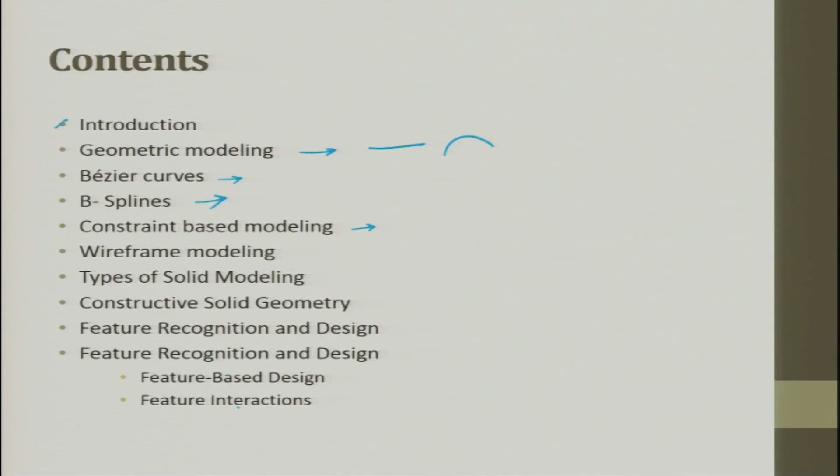So, Bezier curve, B-spline, then we have constraint based modeling, we will see wireframe modeling, then types of solid model, constructive solid geometry, feature recognition and design, wherein which we saw feature based design and feature interaction. So, these are the contents which we will try to cover in this lecture on CAD and CAM. CAD and CAM are nothing but computer aided design and computer aided manufacturing. It is the technology concerned with the use of computers to perform design and manufacturing function.

So, this design, as I said earlier also, will involve drafting. On top of drafting you will have analysis, simulation and optimization. This we will do in this designing. Okay. So, all these things could happen, softwares could talk, everything could happen because the data was in digital form. It can be in ASCII, it can be in binary. If I want to read, it will be in ASCII. If machine has to read, it will be predominantly binary. Okay. So, manufacturing function.

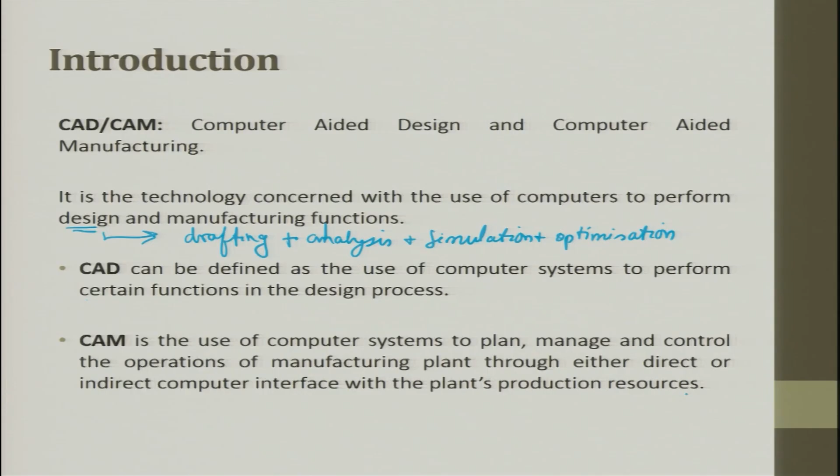The CAD can be defined as a use of computer system to perform certain functions in the design process. CAM is the use of computer system to plan, manage and control the operations of manufacturing plant through either direct or indirect computer interface with the plant's production resources. This is CAM. From CAM definition, the application of CAM falls in two broad categories. One is computer monitoring and controlling, and the other one is manufacturing support application.

Computer process data, you have a process. Computer process data and control signals, this is the advancement. So, first is computer process, the processing data is flowing. Computer process data and control signals are there. So, computer monitoring and control and manufacturing support application. So, in manufacturing support application, you will have computers and manufacturing operations. So, process data and signals will flow here. So, this is manufacturing operations. So, the CAM is divided into two categories: computer monitoring and control, and manufacturing support applications. When we talk about manufacturing support applications, it talks about supply chain and other things.

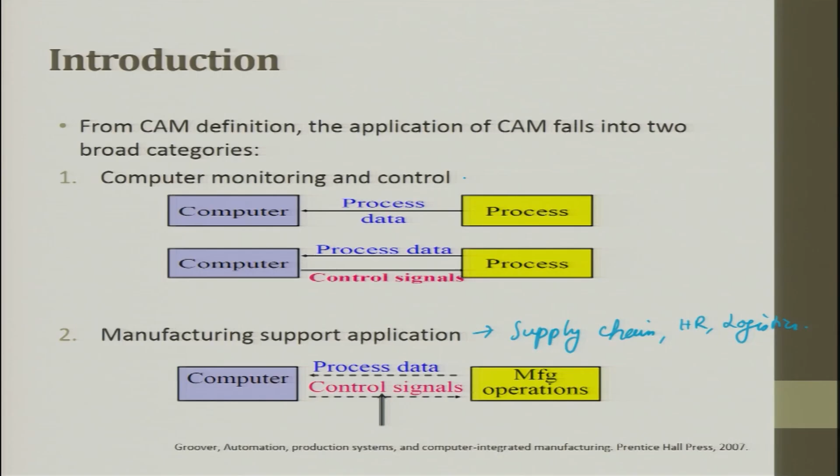Supply chain, HR, logistics. When we talk about computer monitoring and control, it talks about machines and sensors for online monitoring.

The product life cycle and CAD and CAM. In order to establish the scope and the definition of CAD-CAM in an engineering environment and identify existing and future related tools, a study of a typical product cycle is necessary. We will see the product cycle in the next graph. The following figure shows the flow chart of such a cycle. The product begins with a need which is identified based on the customer and market demand.

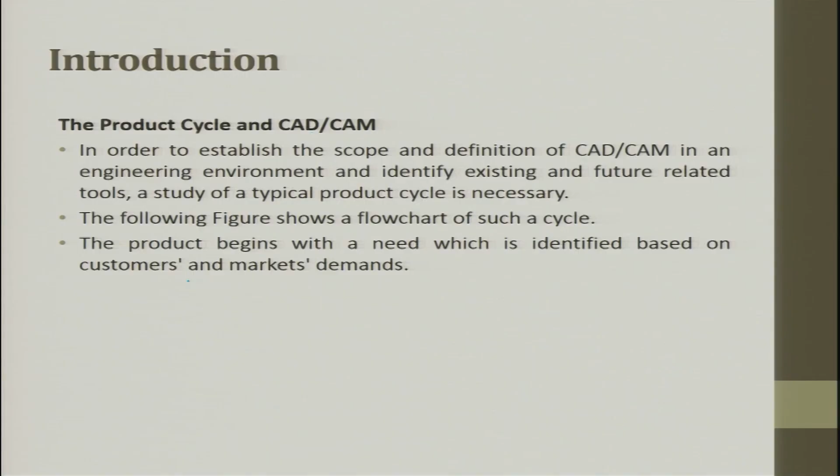After this comes design conceptualization, then design modeling and simulation. This leads to design analysis, design optimization, design evaluation and design documentation. So, these are all part of the design process. From the customer need you put a spec, after putting the spec you do the state of the art, and after doing the state of the art you develop concepts.

These concepts are all proofs of concept, and you can have functional requirements added to them. Then you try to optimize the developed POC such that it can go to the market. Once you do that, you will also have analysis, optimization, evaluation. Here it is only modeling and simulation. Once you simulate, then you optimize.

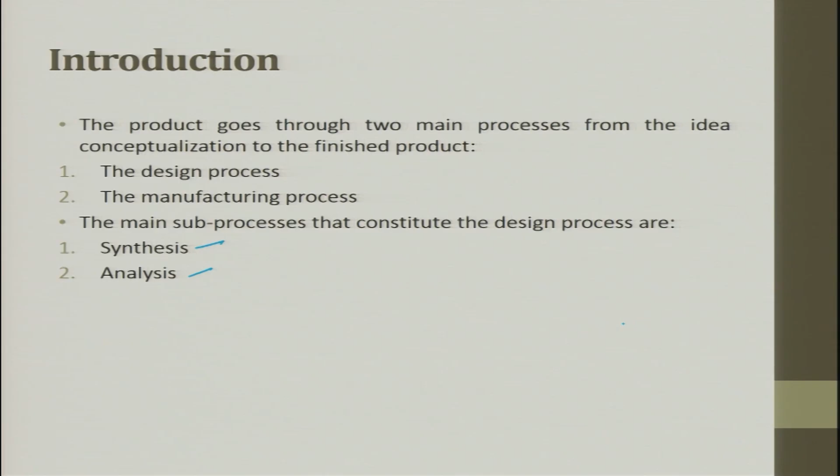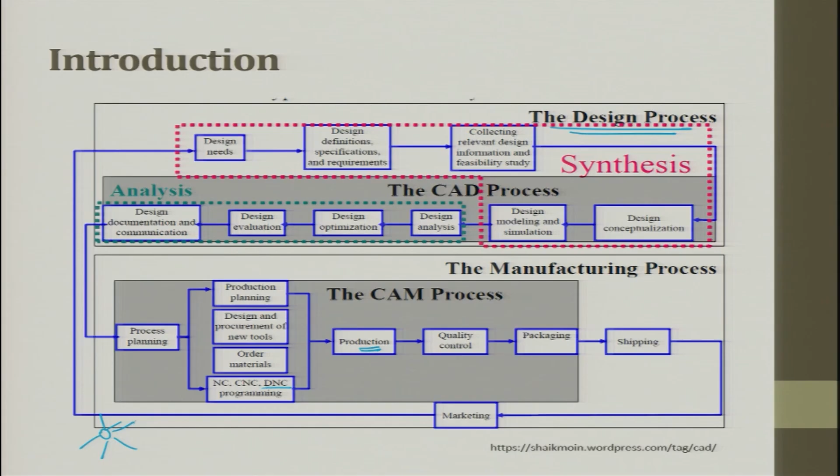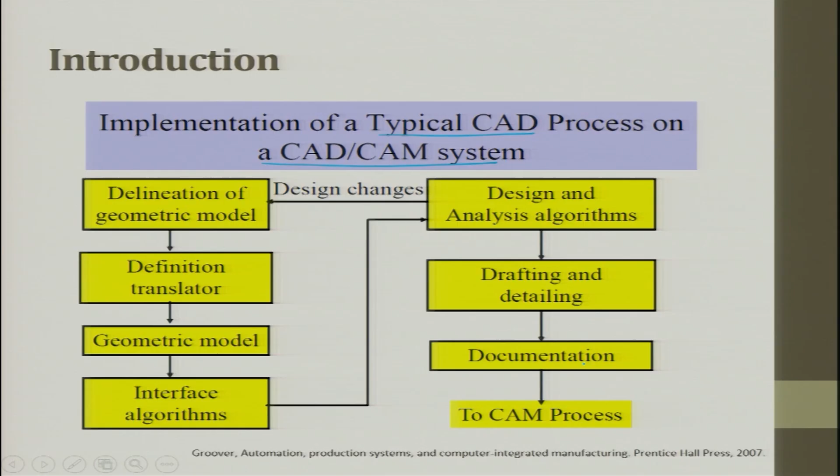The implementation of a typical CAD process on a CAD/CAM system involves delineation of the geometric model, then definition translator, then a geometric model, then an interface algorithm. This interface algorithm goes to the design and analysis algorithm, and design changes can happen between these two. Then comes drafting and detailing, documentation, and finally the CAM process. These are the steps involved in implementing a typical CAD process on a CAD/CAM system.

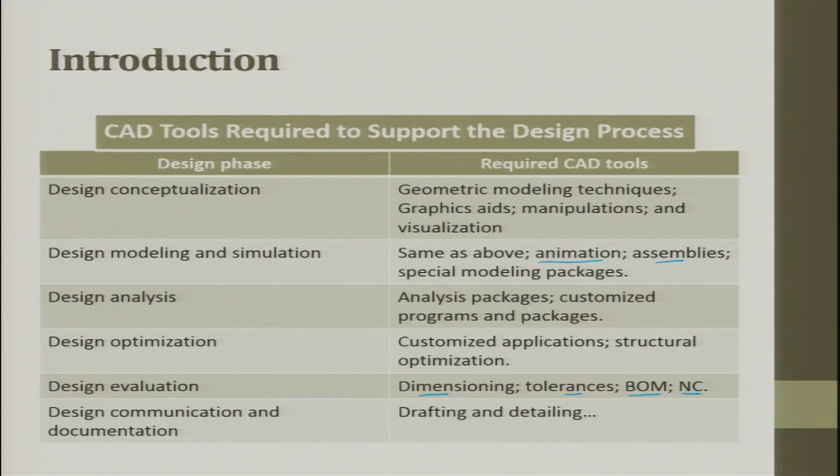Design communication and documentation will be there: drafting and detailing. So these are the design phase, and these are the tools which are involved in the design phase, or these are the tools required for CAD implementation.

When we have to implement a CAM process, whatever you have developed in the CAD, you do a feature recognition. Each feature has a process attached to it, then these processes are chosen, the machine is activated. So the machine knows what it has to do, like what process parameter, what is the tool path, and then it executes to get an output. That is the CAM process.

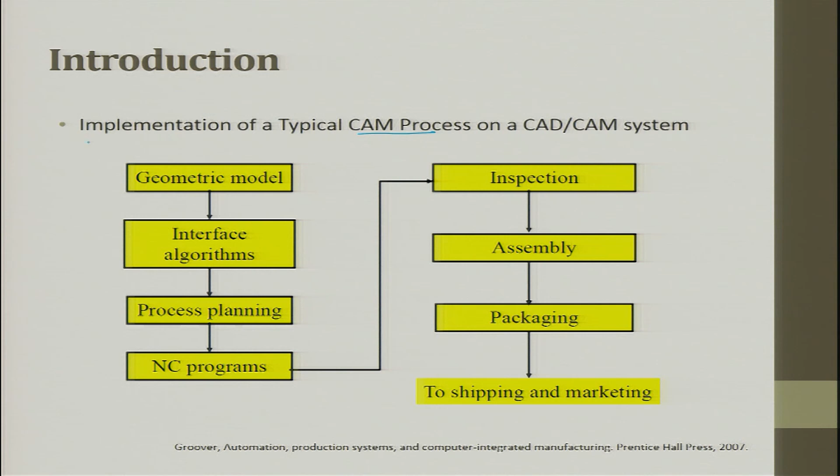So geometric modeling, interface algorithm, process planning is done, NC programs are generated, then you inspect, assemble, package and ship. So this is the implementation of a typical CAM process on a CAD/CAM system. In the same way as what we saw in CAD, the CAM tool requirements to support the manufacturing phase will be planning, process planning, part programming, inspection and assembly.

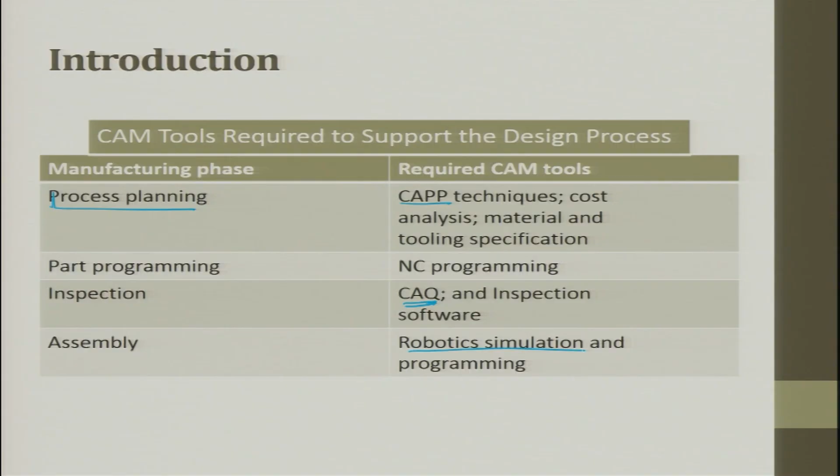So in process planning, we have computer aided process planning. So the computer recognizes the feature, generates a process plan and tells you. Costing analysis, which can be taken from CAPP, material and tool specifications. These are all part of the process plan. Then part programming, numerical control programming is done; inspection, computer aided quality control and inspection software; assembly, robotic simulation and programming are some of the CAM tools which are used in the CAM environment.

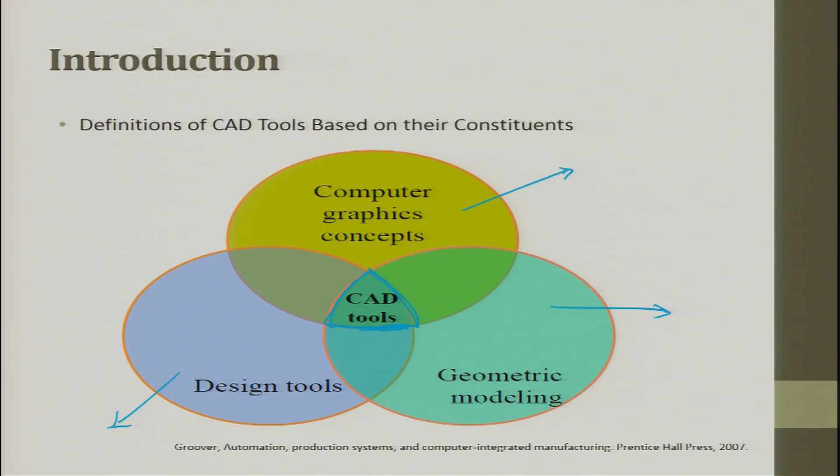So if you look at it, computer graphics concepts, geometric modeling is a separate circle and design tools is a separate circle. These can happen independently. This is the computer alone, this is the model alone and this is the design alone. So if you see, a CAD tool is a combination of A intersection B intersection C. It takes the common zone of the three things. So in the CAD tool, you will have computer graphics concepts, you will have geometric models, you will have design tools.

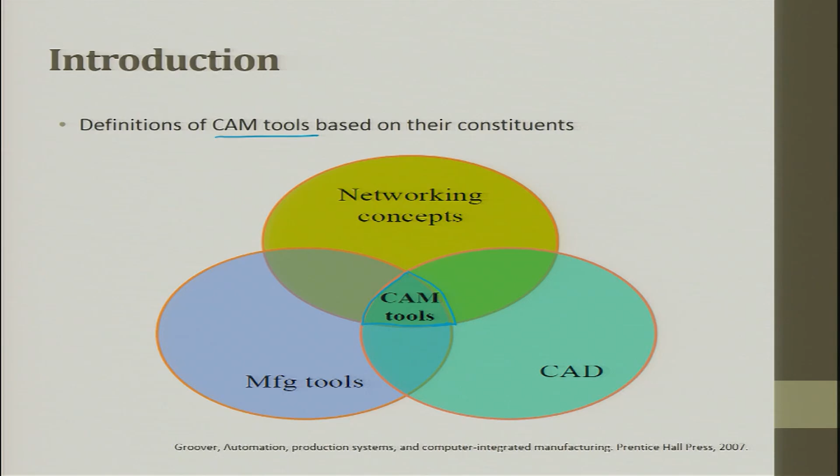When we talk about a CAM tool based on constituents, networking concepts, CAD and manufacturing all meet at a point that is called a CAM tool. All the CAM tools fall here. So you should have networking concepts between two machines; today we have wireless, wired. Then you should have CAD and the machine tool, which is the manufacturing tool. So CAD/CAM tools based on their constituents: design tool, manufacturing tool, networking, computer graphics, geometry, all of them meet at a point called CAD/CAM tools.

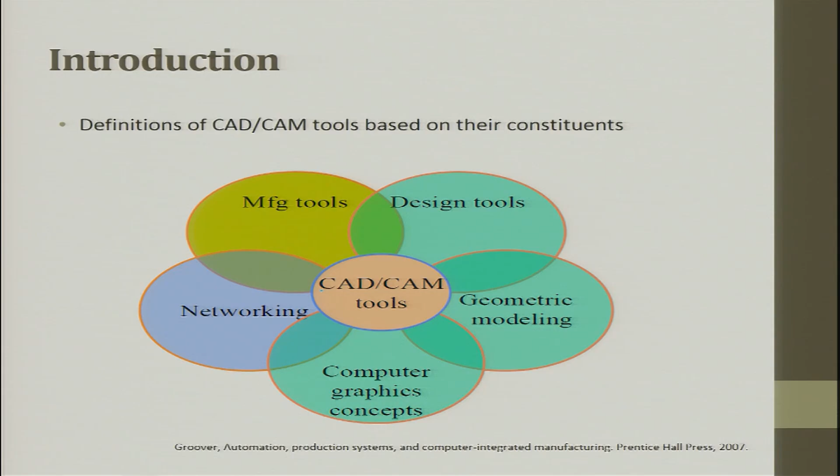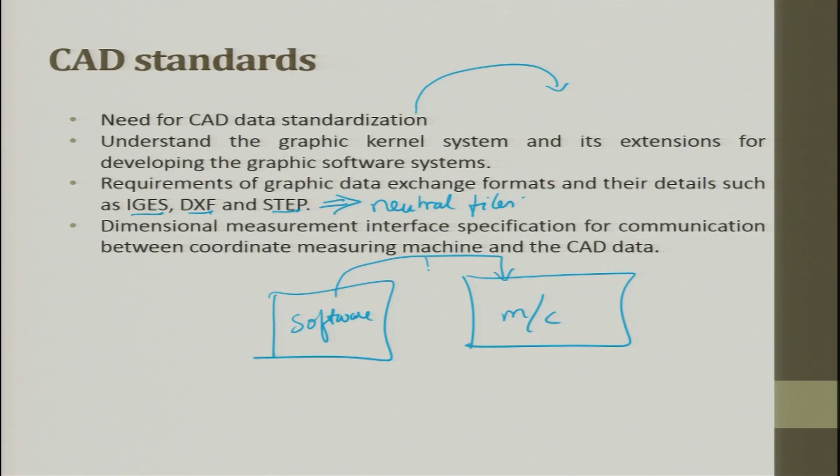What are neutral files? You have a system, you have a software, you have another software or a machine. If you want to transfer the data to this machine seamlessly, without any interference, then this is called a neutral file. So these are some of the standardizations in graphics.

GKS, graphical kernel system. You also have IGES, initial graphics exchange specification; DXF, drawing exchange format; STEP, standard for the exchange of product model data; and we have VDI, virtual device interface; VDM, virtual device metafile; and NAPLPS, North American Presentation Level Protocol Syntax. All these are standard neutral files which are used to transfer graphic data into manufacturing data.

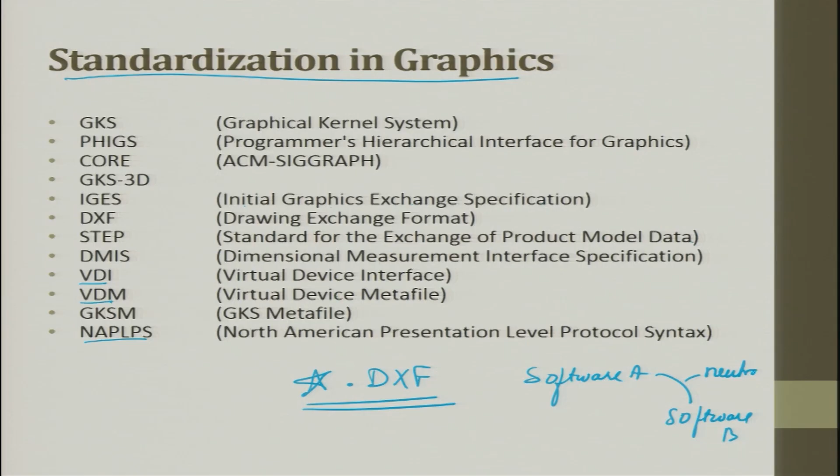So when you draw a component, after finishing the component you can store it with the extension *.dxf. Now this becomes a neutral file, such that when you move from software A to software B to process the data, you need a neutral file. So all these things are part of neutral files.

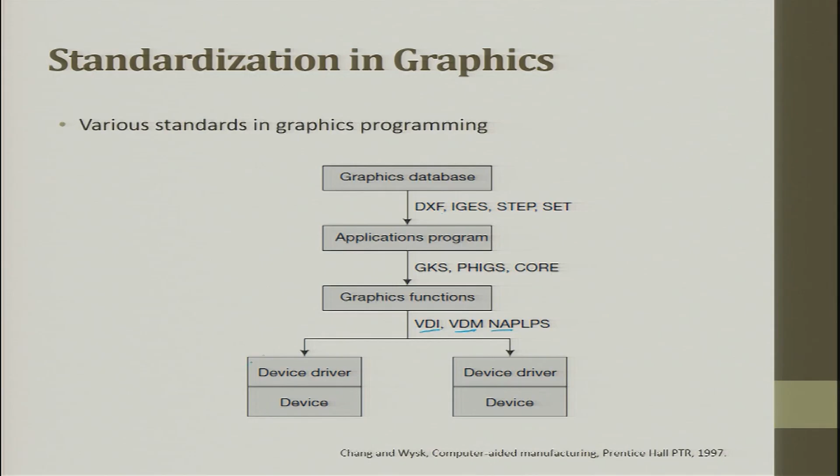Various standards in graphic programming. You have the graphic database, in which you use neutral files DXF, IGES, STEP and SET. Then we have application programs, in which you have GKS, PHIGS and CORE. You have graphic functions, which are VDI, VDM and NAPLPS. Then this will be further divided into device drivers. You can have two different devices which will all get linked to get the graphical program.

GKS, which is the graphical kernel system: the main objective put forward for GKS is to provide a complete range of graphical facilities in 2D, including interactive capability.

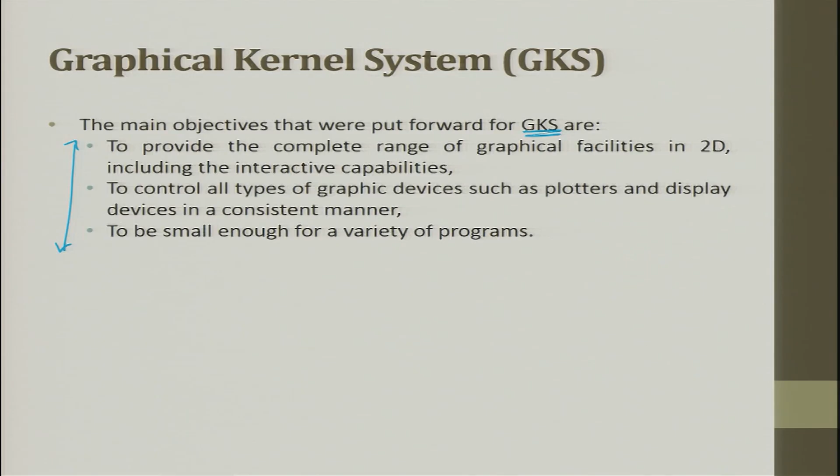You can edit, move and do. To control all types of graphic devices such as plotter and display devices in a consistent manner. So, this was the requirement for GKS. GKS again is a transfer of data from a CAD system to the device, to be small enough for a variety of programs. So, these are the requirements which were put so that the data can be transferred from a CAD file, from a CAD system to a plotter or to another accessory or to a machine.

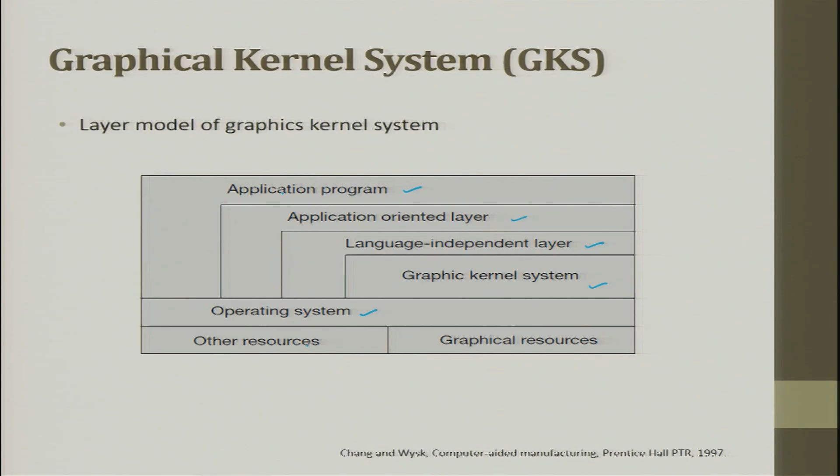The layer model of the graphic kernel system is: you have application programming, then application oriented layer, then language independent layer, then graphic kernel system. You have an operating system which is at the base. In the operating system again you have two other resources and graphical resources. So, these two are added to the operating system, then graphic kernel system, language independent layer, application oriented layer and application program.

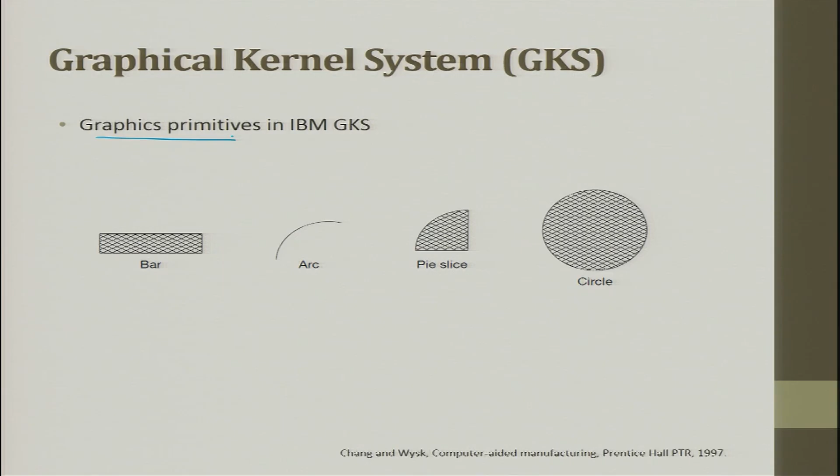Graphic primitives in IBM GKS are bar, arc, pie slice and circle. These are all primitives which are already available in the graphic kernel system. Other graphic standards are GKS 3D, PHIGS and NAPLPS.

So, the data exchange between various systems is CAD A to CAD B, CAD B to CAD C, CAD C to CAD D. So, you can have A B, B C, C D, D A. So, you can see all these things are linked. So, the data exchange between the various systems is very important. Otherwise, in manufacturing what will happen is you will have islands of automation, but all these automations cannot talk to each other. If it cannot talk to each other, then there is a big difficulty. Every time the data has to be transferred into the other system manually, and then you start doing some editing process.

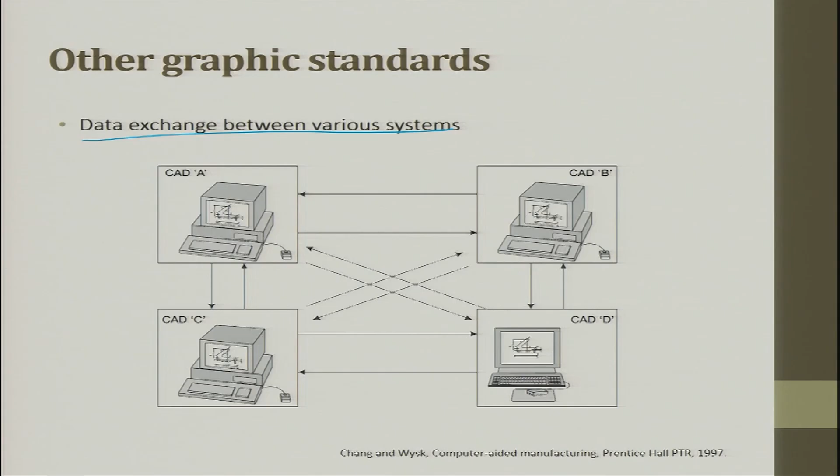So, development in the drawing data exchange format: these are the years when it was started, here are the contributions made, and this is how the evolution happened. So, IGES 1.0 came, then ANSI Y14.26M came, IGES 2 protocol, IGES 3 protocol, 4 protocol, 5.3 protocol which came in 1996, and this led to ISO STEP. And in between, IGES 3.0 led to PDES, which is nothing but product database format, and PDDI; they all came into existence.

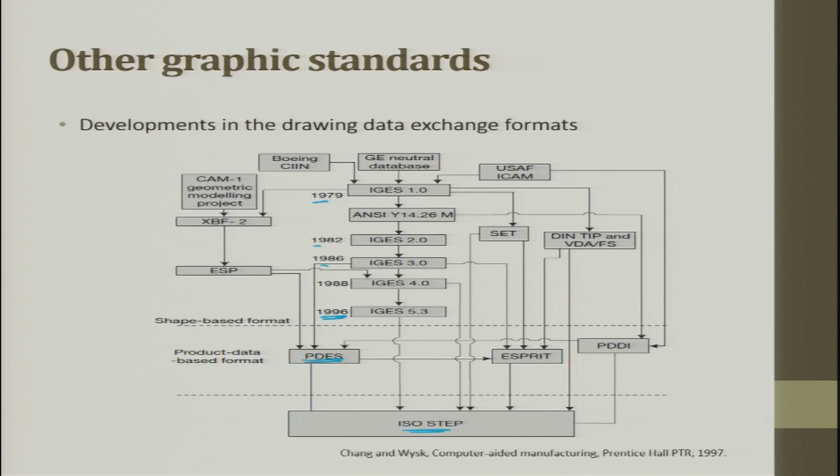So, here it is a shape based format, initial shape based format, then it is product database format, and then finally from all this evolution, today we talk about STEP, wherein the process details are also attached with the feature whatever is getting generated. IGES is the most comprehensive standard and is designed to transmit the entire product definition, including that of manufacturing and any other associated information.

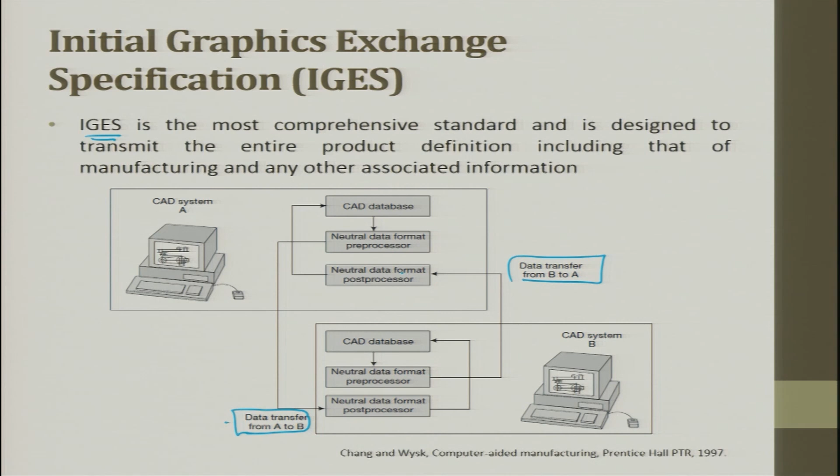Okay. So, the data transfer happens from A to B, or the data transfer happens from B to A. The only difference is if you say B to A, the neutral data format pre-processed gets into the post-processor, so that the data is understood by the other CAD system in a very logical manner.

So, this is how an IGES file looks like. A component which is a bolt, with a threading, with a head: component drawing and a part of the IGES file generated. You will see a stack of data, a column of data, which talks about an arc, line, B-spline, and then you have a curve, you have other surfaces. So, this is how the output of IGES looks, which is pre-processed, post-processed such that the other system can understand.

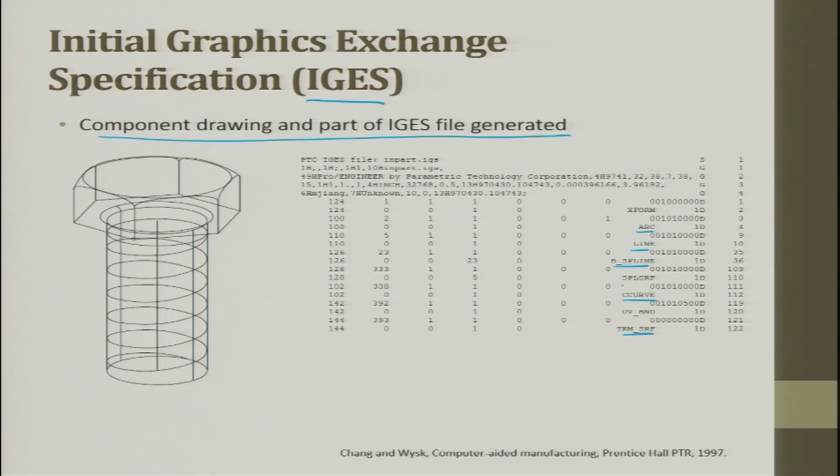The latest standard which we saw, ISO STEP. STEP is nothing but standard for the exchange of product model data. So, today we are not trying to transfer the data from one CAD system to the other as individual features or individual entities, but we are trying to completely shift it like a product itself. Like writing a small library function; a library function is already written. In this library function, you just put some parameters and you change the requirements whatever you want. For example, you have a library function of making a bolt.

So then all you have to say is what is the pitch you need, what is the length you need, what is the head you need - all those things. Then the system itself generates the entity. A step will happen where you will have other details like manufacturing tolerancing, and other details will also be attached along with the entity details.

A broad scope of STEP is as follows: the standard method of representing the information necessary to completely define a product throughout its entire life, from product conception to end of life, can be done by STEP. The standard method of exchanging data electronically between two different systems is done using STEP.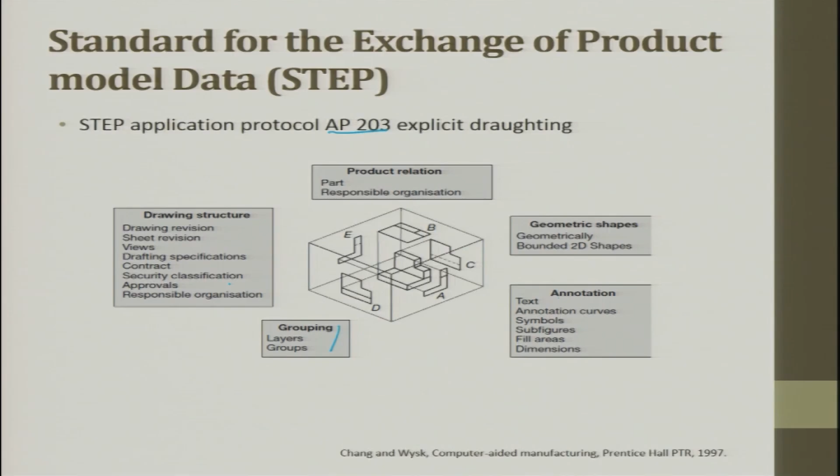So you have so many pieces of information coming out of STEP: product relation, part, responsible organization, then geometric shape, geometrically bounded 2D shapes, then annotation, text annotation, curve, symbol, subfigure, filling area, dimensions. Then we have grouping of them, drawing structures, drawing revision, sheet revision, view, drafting specification, contract, security classification, approvals, and responsible organization.

When we talk about controlled design, AP207 comes into existence - you will have configuration management, shape. Here you can see advanced BREP; we will see what BREP is as and when we go down. Then we see product structure, we see simplification.

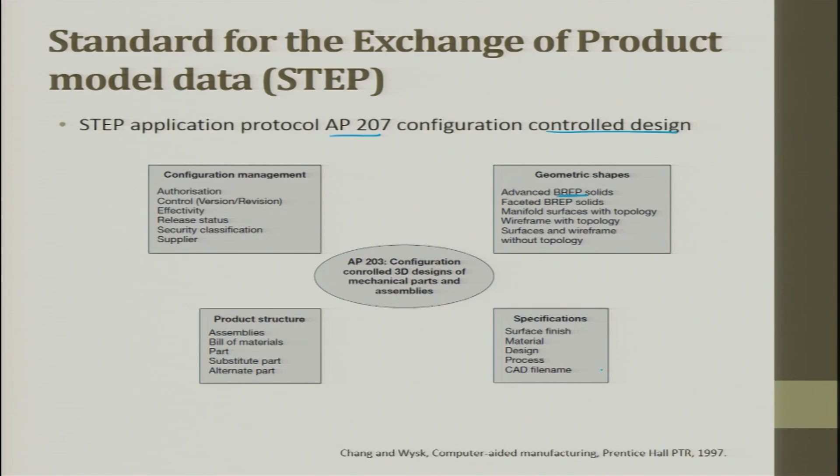Today, when we talk about ERP software, product structure and bill of materials can be attached directly to the CAD file, and you can extract information and send it to different departments of manufacturing. So STEP application protocol AP207, configuration control design, is this.

Here is another example of STEP file generation: sheet metal die planning and design. Again shape, definition, item, and then you have process plan, and whether the work is internal, external, start or change.

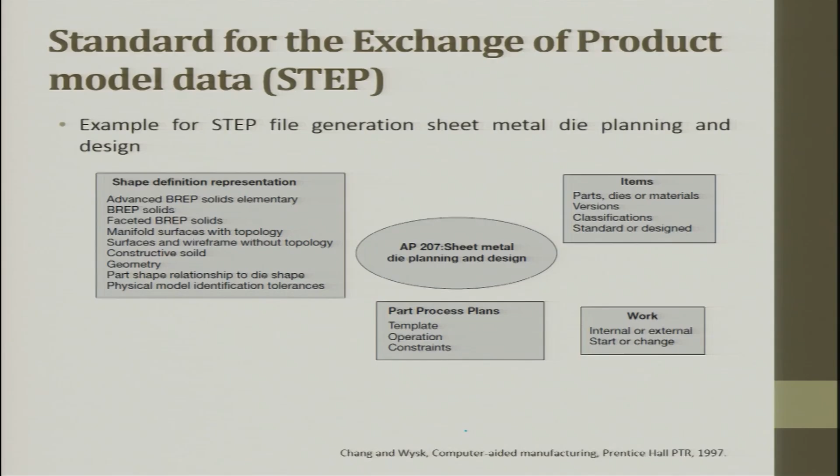DXF we saw, which is used by AutoCAD. The dimensional measurements interface specification, DMIS, is a new standard of communication being established by CAM-I for manufacturing.

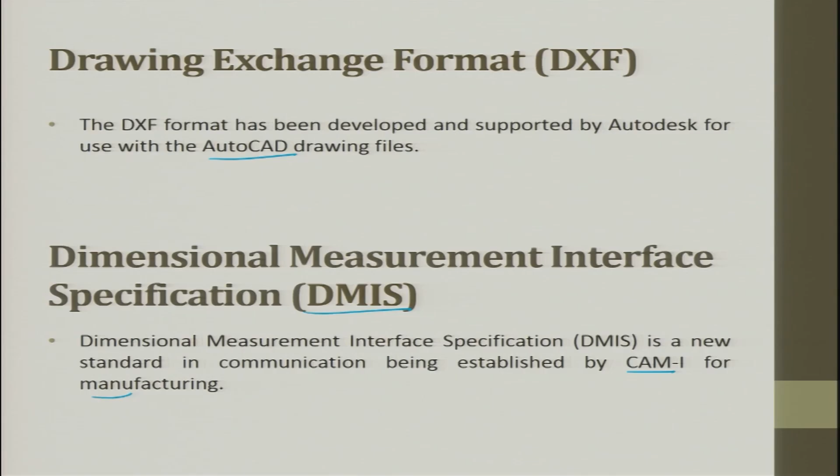Initially DXF and IGES were only used to transfer data from one CAD file to another CAD file, but once STEP came into existence, it is used to transfer CAD data to a CAM environment, and the protocol is more and more focused towards manufacturing, wherein dimensions, tolerances, the product life cycle - everything can be done.

So now let us move to the new topic, which is geometric modeling. How do I draw a part in a CAD file? That is geometric modeling - I will try to model a part in a CAD file.

The objective here is to understand the various requirements for the information that is generated during the geometric modeling stage, to study various types of geometric modeling possible and their applications, and develop various methodologies used for geometric construction such as sweep, surface modeling and solid modeling.

Recognize the various types of surfaces and their application as used in geometric modeling. Appreciate the concept of parametric modeling, which is very important - we will see later - which is the current mainstay of most 3D modeling systems.

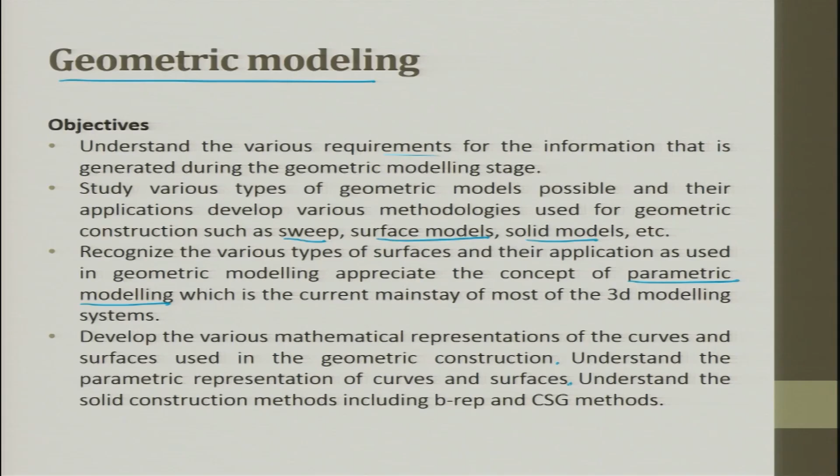Develop the various mathematical representations of curves and surfaces using geometric construction. Understand the parametric representation of curves and surfaces, and then finally understand solid construction by including BREP and CSG.

When we talk about geometric modeling, the requirement for geometric modeling is you have to have an idea, you have to have a production, you have to have a design analysis. The center part is the geometric modeling - the geometric modeling is the center part of the product design.

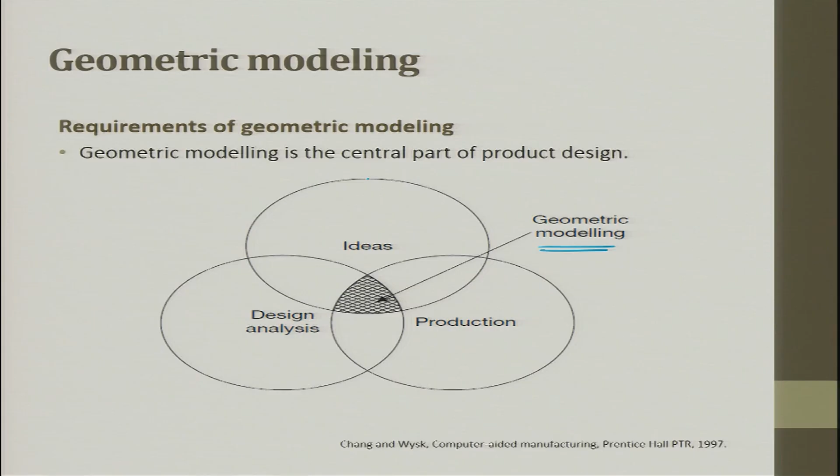What are the functions of geometric modeling? In design analysis, it is used for evaluation of area, volume, mass, inertial properties, checking in assembly, tolerance build-up in assembly, analysis for kinematics - that is mechanics and robots. It is also used for auto mesh generation for finite element analysis. All these things are done at the design stage, design analysis.

Then when we start using this for drafting - geometric modeling for drafting - we can automatically get planar cross sections, automatic hidden line and surface removal, automatic production of shaded images, automatic dimensions, and automatic creation of exploded views for technical illustration. All these are functions of a geometric model.

Here it is more of drafting, so that is only drawing - that is why you see cross section, creation of exploded views and all those things. Here if you see area, volume, CG, mass - all these things can be evaluated from the design analysis.

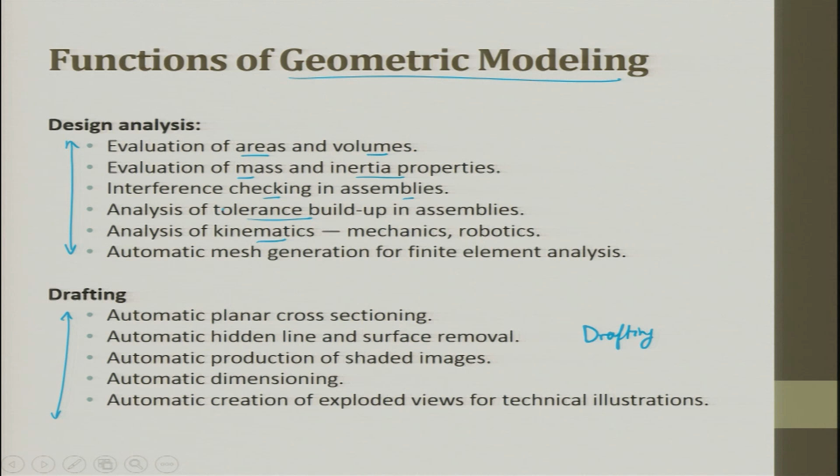When you talk from the manufacturing side, the geometric model is used for part classification. What is part classification? Part classification can be done based on the design similarity or on the manufacturing similarity. Design again can be divided into prismatic and it can be divided into circular.

If we see later, we will look at group technology. If I want to classify a part and give it a part number, geometric modeling plays a very important role as the input data. Then comes process planning, numerical control data generation and verification, and robot program generation.

These are the functions of geometric modeling in manufacturing. In production engineering, bill of materials, materials requirement, manufacturing resource requirements and scheduling are all functions of geometric modeling. Finally, in inspection and quality control, program generation for inspection machines and comparison of the produced part with the design are part of this process.

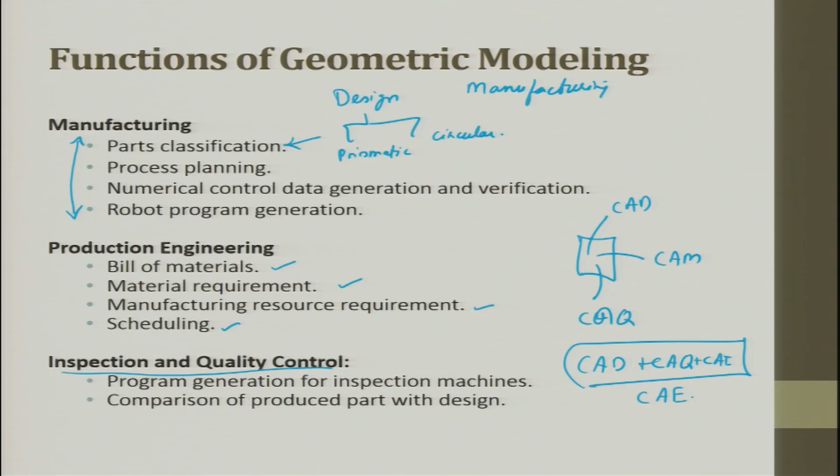Today we talk about using the same center data created for CAD, moving to CAM, and then to CAQ, computer aided quality control, for checking. So CAD, CAQ, CAM, all of these lead towards CAE, computer aided engineering.

Requicha and Voelker specified the following properties desired in any geometric modeling system. The configuration of the solid must remain invariant with regard to its location or orientation. Whatever orientation or location you take, whether viewed from the front or the top, the geometric model should have a consistent figure. There should not be any variance.

The solid model must have an interior and must not have isolated parts. For example, you cannot have something like this and say these two are interlinked.

The solid must be finite and occupy only a finite space, a closed volume. That is why you can do mass calculation, inertia calculation, volume calculation, and CG calculation, all of these things, because it must have a finite and occupy only a finite shape.

The application of a transformation or other operations that adds or removes a part must produce another solid. So if you have a solid like this and a cylinder like this, and you say A minus B, you should get something like this, an object with a hole inside.

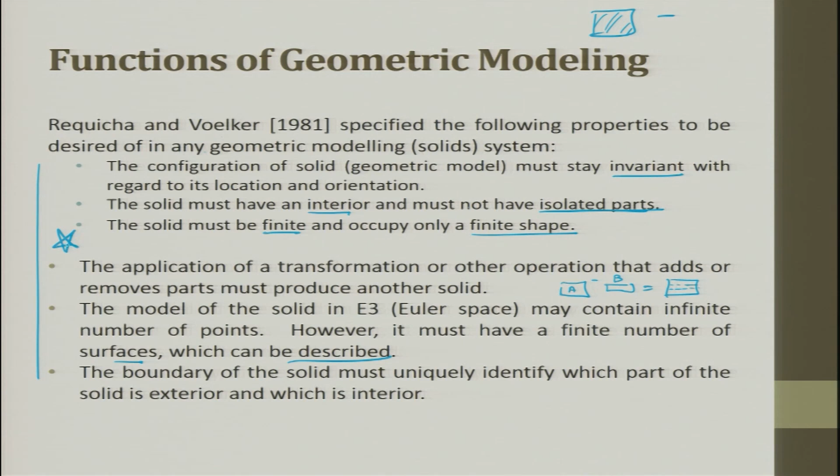A model of the solid in Euler space may contain an infinite number of points, however it must have a finite number of surfaces which can be described. All these points are very important to validate an object, or to state as functions of a geometric model.

The boundaries of the solid must uniquely identify which part is interior and which part is exterior. All these things are very important for us in this course, because whatever CAD data you create, if it does not follow the functions of a geometric model, then this data will be transferred to the rapid prototyping machine, and the machine will start executing it.

The moment it executes, if it cannot identify interior and exterior, it is too difficult for it to build a part. Second, if it does not form a finite volume, for example if you have a square like this, and this CAD data is given to rapid prototyping, since it is not closed, it takes the rest as a valid object, and continues, making this projection part of the rapid prototyping process.

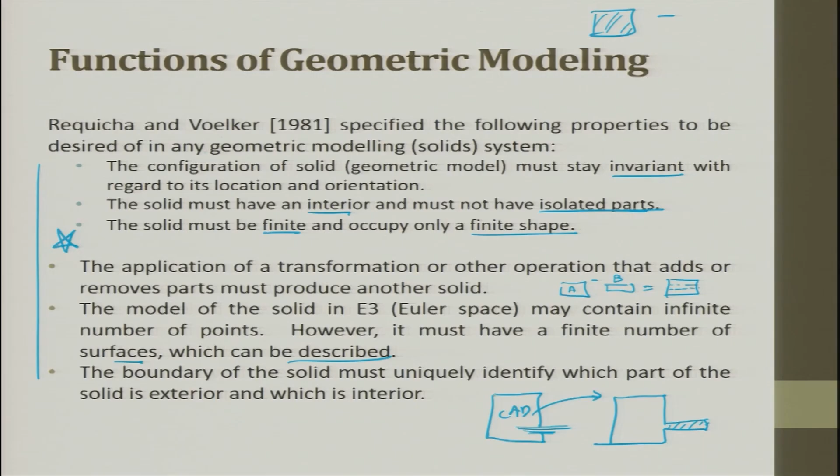So geometric modeling is very useful. The functions and properties of geometric modeling are very useful as far as rapid manufacturing is concerned. Any mistake here, when taken to the next stage, gets amplified.

Geometric modeling can be 2-dimensional or 3-dimensional. For 3-dimensional principal classification, they fall under line, surface, and solid. A dot and a dot lead to a line, vertices to an edge. These are edges and these are faces, and several faces join together to form a solid. So, point, point to line, line to surface, surface to solid. These are the three principal classifications in geometric modeling.

So you can see here P1, all these are points, P1, P2, P3, P4, P5, 6, 7, 8, 9, 10, 11, 12.

So P1 to P12 are the points, and these points are joined by a line. Now these points and lines join together to form a surface. So you had P1 to P12, now you have S1 to S8, which are surfaces - S1 through S6 at the back side, S7 at the bottom, and S8 at the other side.

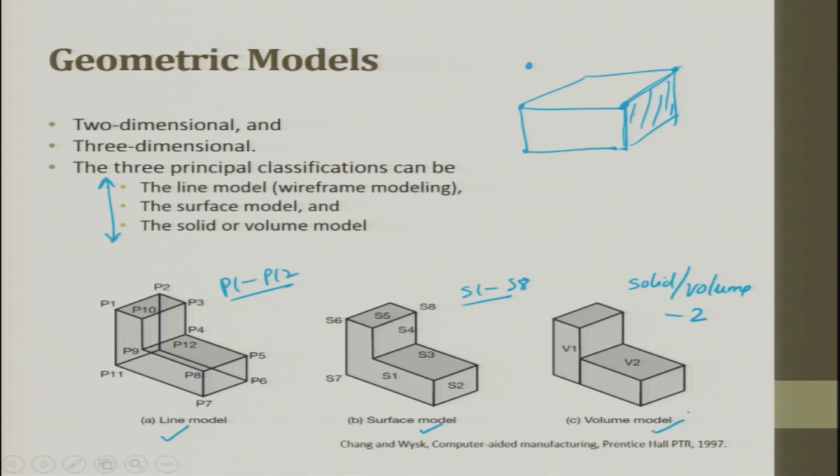So in geometric modeling you will have all 3 possible things. In geometric modeling, when you represent it in a wireframe - what is a wireframe? Wireframe is nothing but you have points, and these points are joined by a wire, and this representation tries to give you a solid.

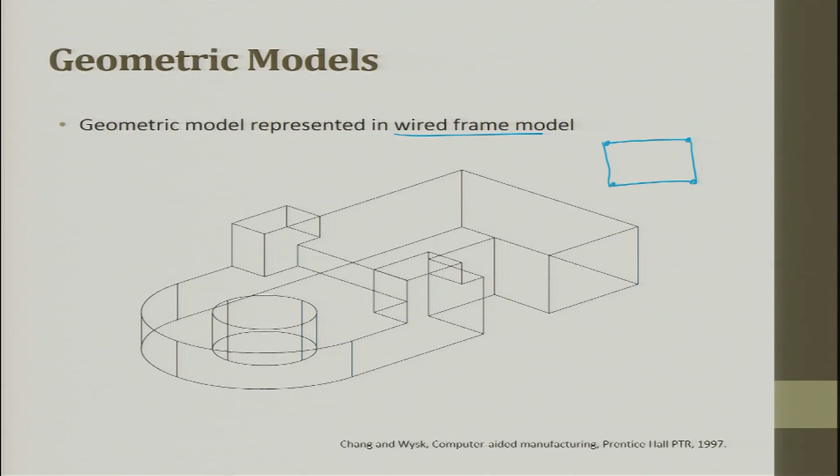But unfortunately, when you use a wireframe model, it gives a lot of misinterpretations, and it can also give you a solid which is not very valid. But it occupies very less space, so editing and storing becomes little easy. But the representation is ambiguous - impossible objects can be modeled using this wireframe.

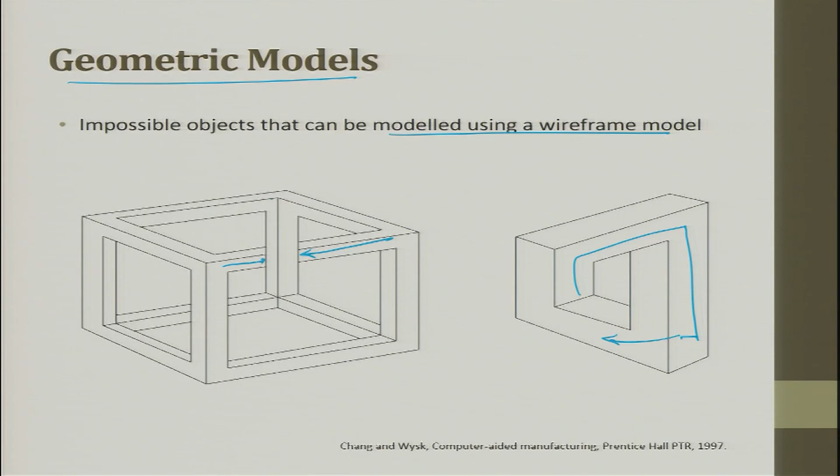So you see here, this is an object - you have to see it like this, and here, if you see, the block or beam goes behind the column. So geometric modeling wireframe model can be used to model impossible objects, or it leads to ambiguity. That is why wireframe is not exhaustively used.

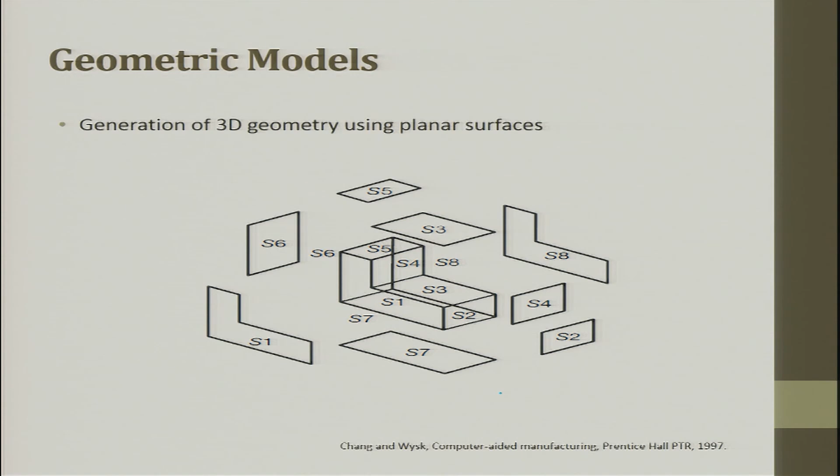Generation of 3D geometry using planar surfaces - you have so many surfaces, and these surfaces join together to form a solid. So comparing the 3 different models - line model, surface model and solid model - what we want as far as rapid manufacturing, rapid prototyping is concerned, is only the volume model, that means the solid model. We are least bothered about line and surfaces.

Automatic view generation is impossible in line model, impossible in surface model, possible in volume model. Perspective and orthographic views are possible only in volume. Cross section, if you want to do, manually you can guide it - in surface also it's manually guided, but in volume it's possible, even automated cross hatching is possible as far as volume is concerned.

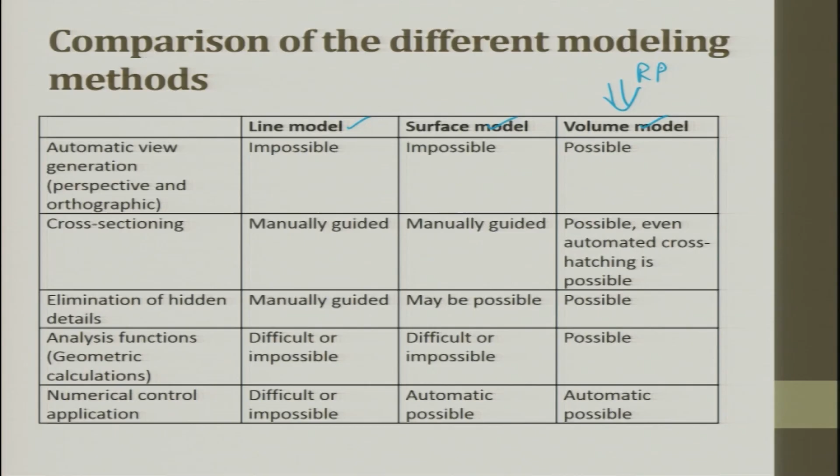Elimination of hidden details - it is manually guided here, may be possible here, and it is definitely possible here. Analysis function is difficult in line, difficult in surface too, but possible here. Numerical control applications are difficult or impossible here, but automatically possible here, and automatically possible here. So what we need for RP, rapid manufacturing, additive manufacturing, is the volume model.

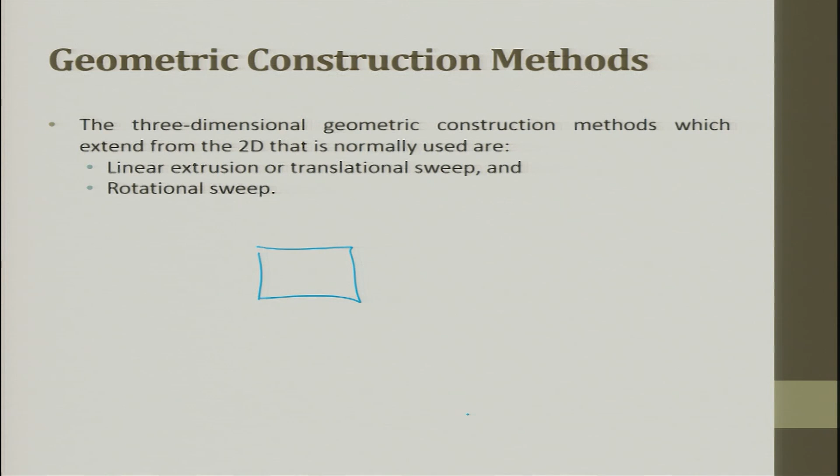The 3-dimensional geometric construction method which extends from 2D that is normally used are linear extrusion or translational sweep. What we are trying to say is, suppose I draw a square and then I say please extrude the square along this line.

Now you get a channel. So if I want to represent this, I can represent it as a surface, and then I say in this direction Z, please try to give a thickness of 5 millimeters or 5 meters, whatever it is. So this is line extrusion of the square or rectangle - translation sweep, also called a sweep, line extrusion or sweep.

If you want to do a rotation sweep, this object, when you have a rotational sweep, tries to convert it into a full solid object. This is rotational sweep - the 3-dimensional geometric construction method which extended from 2D.

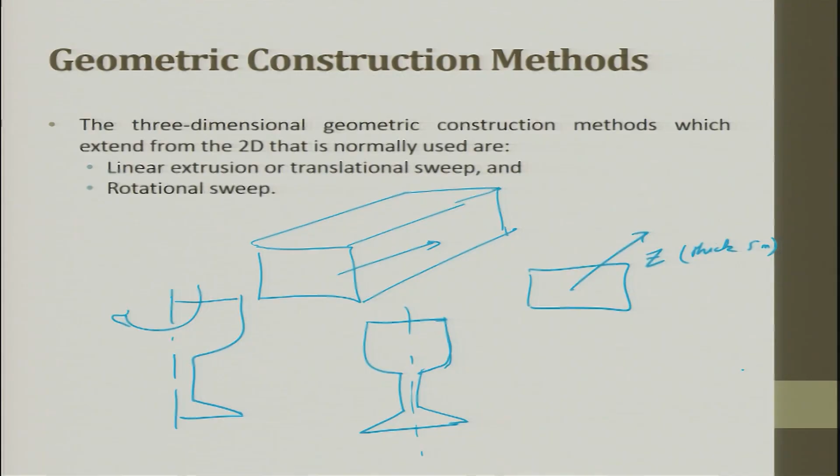See, first we did only 2D - point, line, and then curve. Now what is happening, from 2D we did some simple operations like extrusion and rotation, rotational sweep. So now we have started representing 3D objects in 2D form by just giving some small variations, that is translation sweep or rotational sweep.

The geometric model produced - you can see here, this is a topology, you say please extrude it in this direction, so you get a model. So linear model and sweep extrusion was tried. The component model produced using translation sweep with taper in the sweeping direction is also possible - you can say this way, so it's an extruded solid with a taper.

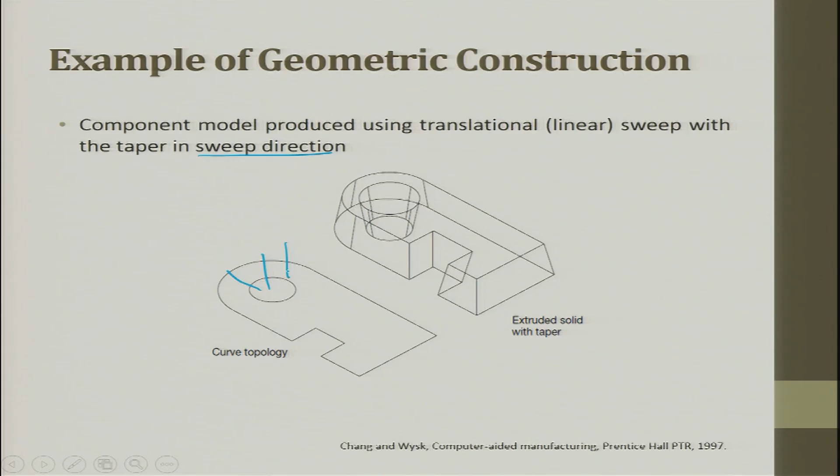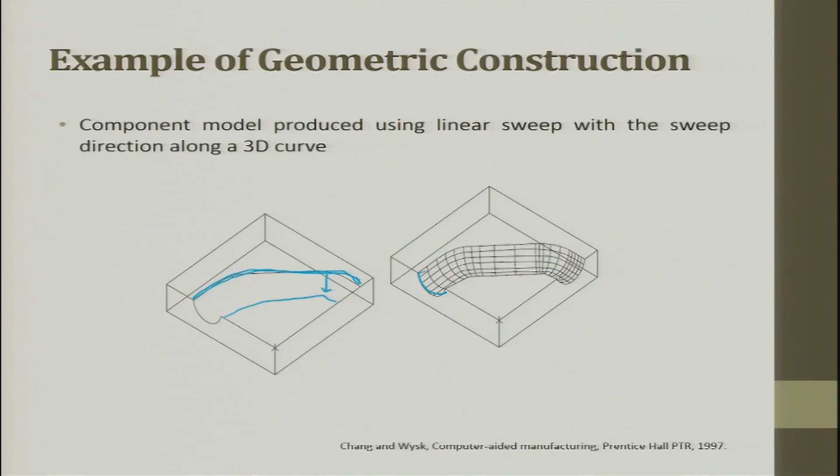You can see here, this is a curve produced with linear sweep with the sweep direction along a 3D curve. So this is the sweep, and then you said please sweep it in this direction. So you get this. So basically, I define 2D and I get a 3D by doing some operations on the object. Component model produced using translation sweep with an overhanging edge.

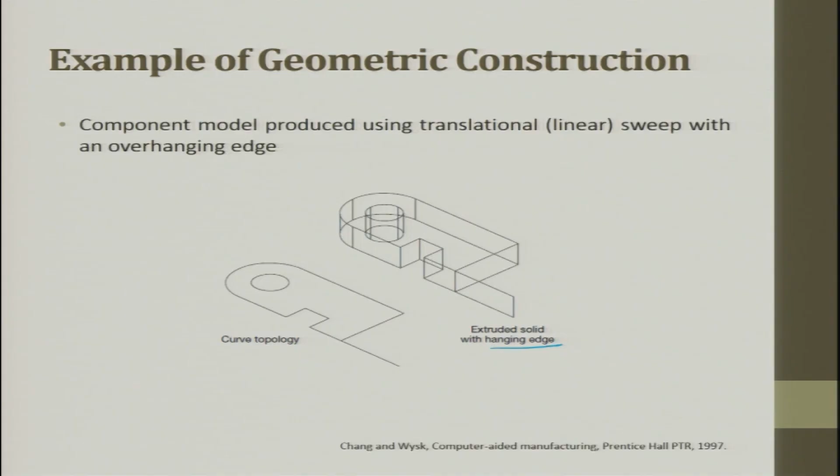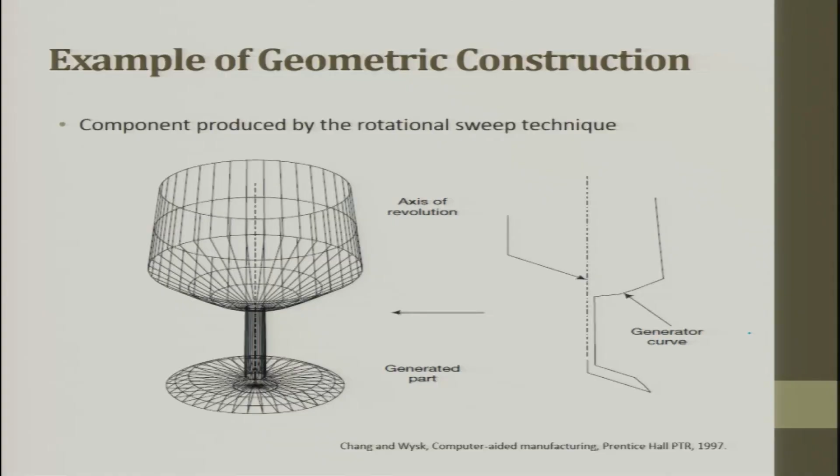You can also make an overhanging edge. It's like the opening of a lid. So an extruded solid with a hanging edge, we can also get that. So, in a crude sense, it is 2D, 2.5D, then 3D. You are going from 2D to 3D, and in between you have translation sweep and rotation sweep. I have already dealt with this. The rotation is done about an axis. So these are various solid primitives which are available.

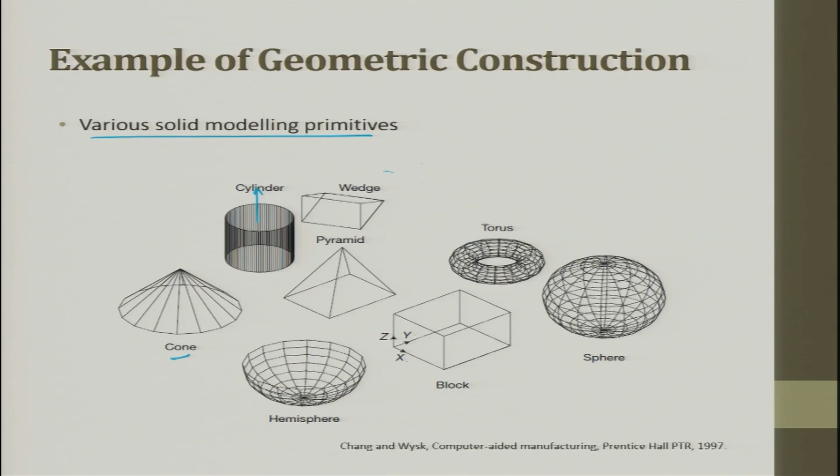In the next stage, you started making standard primitives, wherein a program is written and stored. All you have to do is call that primitive and give the parameters, so you get a 3-dimensional object. Look at how the evolution happened in CAD. And with that evolution, people got a little smarter. They started adding Boolean operations. So what is a Boolean operation? You will have union and you will have intersection. These two Boolean operations are now done.

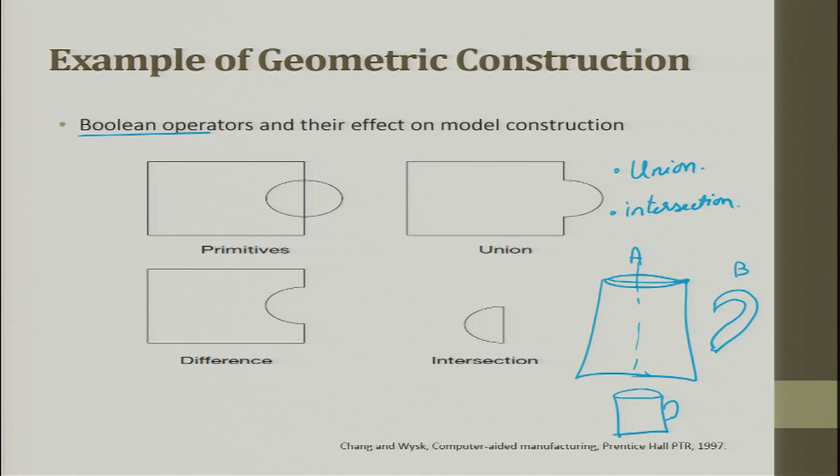So what is the advantage? If you want to develop two different objects that are to be connected, for example, I have a cup, and then I have to attach a handle. So how do I do it? I take A and B, and what I get will be A union B. So this is A union B operation. After creating simple 3D models, people started using Boolean functions to develop 3D objects in a more creative manner.

You can see here the Boolean operations and their effect on the model. You had a block, you had a cylinder. If you subtract the cylinder from the block, the side view will be like this object. If you join these two, it will form a single object. If you move the cylinder to the edge and do a union, it will become something like this. Now you say I want only this portion removed, so I use the difference option, and I can also get the intersecting portion alone.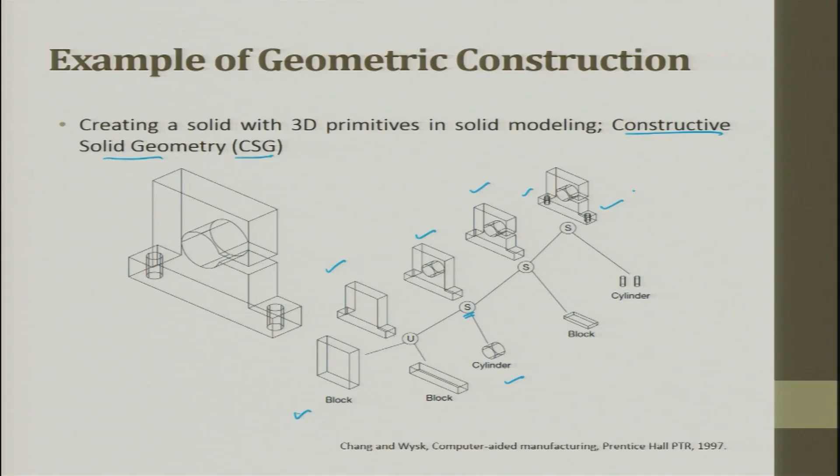So, till now what we saw was all about engineering surfaces, where it is all easy to draw, easy to manufacture. But what is required in real time applications is free form surfaces. So, to construct free form surfaces, you need to have more sophistication than whatever was existing till now. So, here again we will follow 2D, then we will move to 3D. So, first we will talk about planar surfaces.

In planar surfaces, it is a flat 2D surface. Then next one is curved surface: single curved surface, that is a simple curved surface, then double curved surface, which is complex surfaces generated not by a straight line but a curved object. Then ruled surface is a surface constructed by transitioning between two or more curves by using linear blending between each section of the surface. We will see what ruled surfaces are in the coming slides. So, these are used for generating free form surfaces.

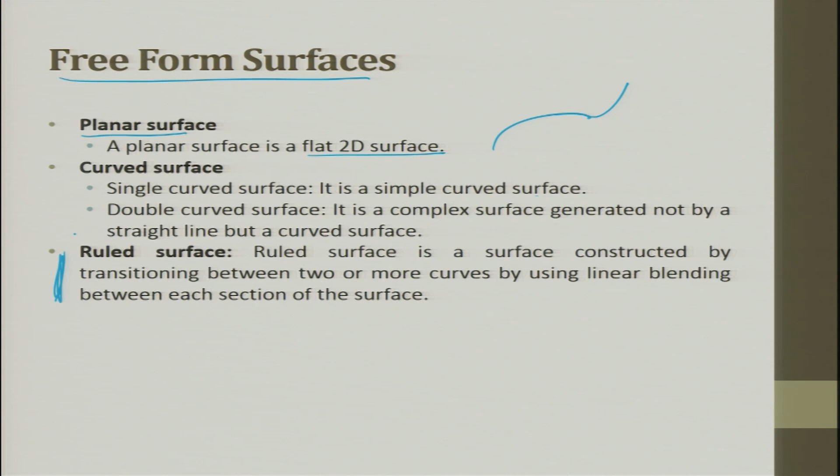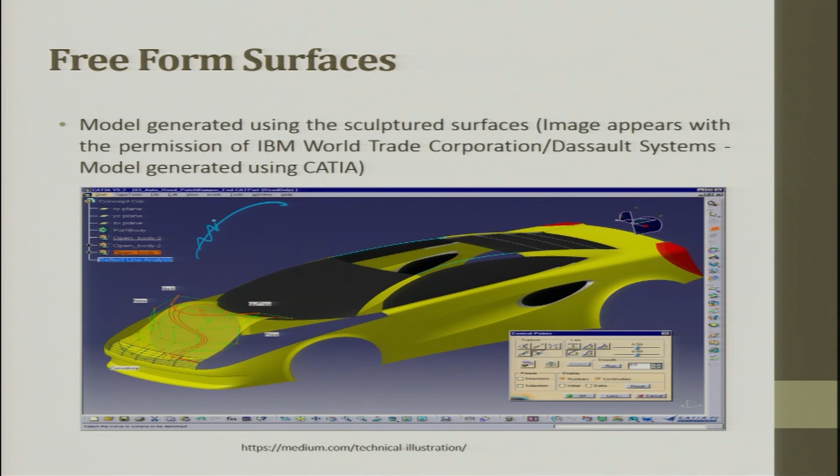Curve, single curve, double curve, then we went to ruled surface. Today you see in reality it is all free form surfaces. This model is generated using sculptured surface, and it is energy efficient; the drag is reduced. And here if you see, no edge, no surface is straight flat. It is all curved, complex curves are there, and inside a curve itself you have many variation facets. This is done by CATIA software.

When we talk about freeform surfaces, in a nutshell, these are the various types of surfaces in the geometry. So, we will have planar surface, curved surface and freeform surfaces. In planar surfaces, you will have planes. These planes are done by polygons and polyhedrals. When we talk about curves, there will be single curve and double curve. Cylinder and cone are part of single curve. Double curve is ellipse, ellipsoid, sphere, paraboloid and torus. And then from here it goes down to ruled surfaces.

When we talk about freeform surfaces, you will have Coons surface: B-spline, Bezier, NURBS and fractals. So, this is very important, and this is the big thing which CAD gave to the manufacturing community. How do I generate freeform surfaces? By using Coons surface. In Coons surface we had B-spline, Bezier, NURBS and fractal. All of nature follows the fractal design. And finally, the lofted surface: ruled surface and lofted surface.

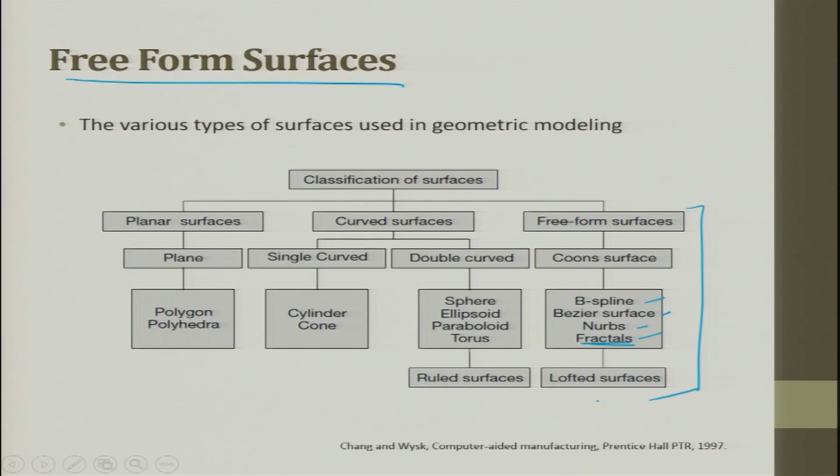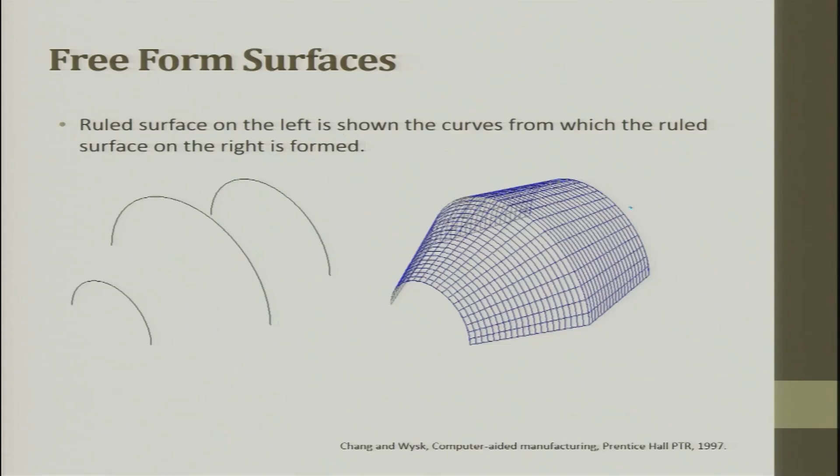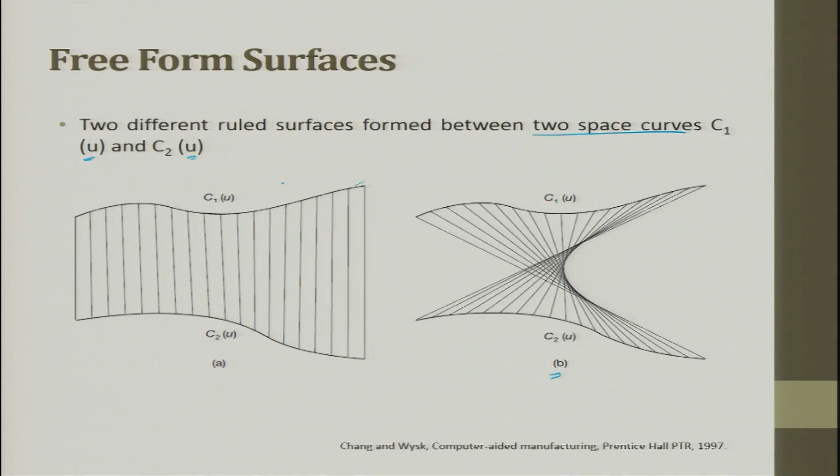This is an example of a ruled surface. On the left are shown the curves from which the ruled surface on the right is formed. So, we have two ruled surfaces formed between two space curves C1 and C2 with U as a control point or vector. So, we see C1, C2, U and U, and when we try to go in the other direction, you get a surface like this. So, two different ruled surfaces formed by two space curves C1 and C2; depending on the way you specify them, you can generate two different surfaces.

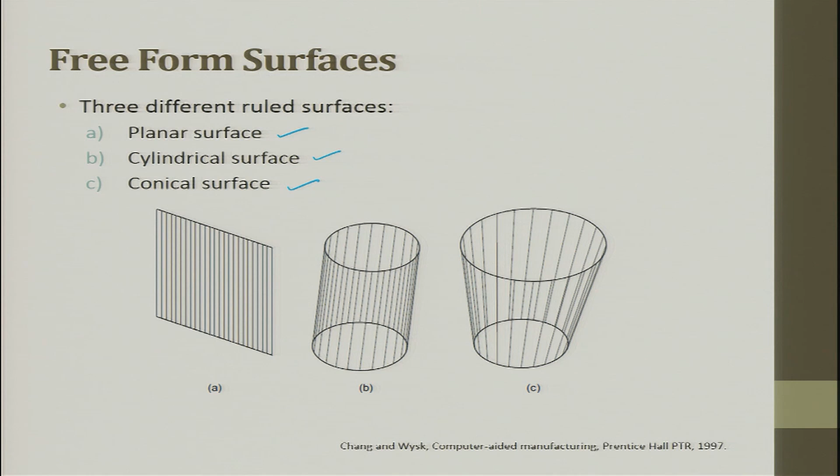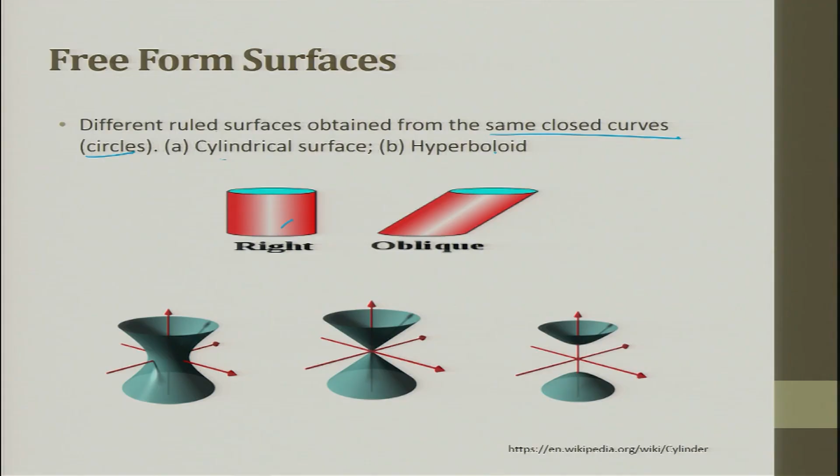It is different ruled surfaces obtained from the same closed curve, a circle: you can get a cylindrical surface, and a hyperboloid surface also. So, we will stop here and continue in the next class.